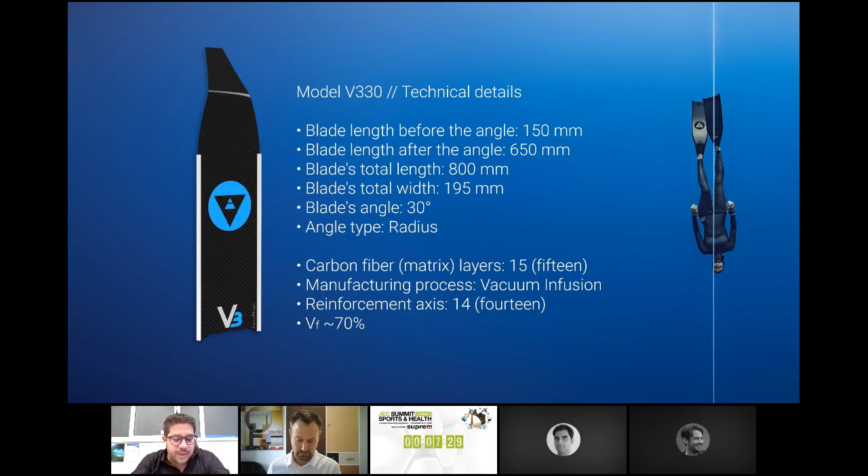This led us into taking advantage of the vacuum infusion process, which we are still using today to produce our blades and fins. That was quite new and difficult at that time because of the high cost of the consumables needed for the infusion process, but we knew that this was the first step to control our fiber to epoxy ratio and have a consistent result. That was our first innovation compared to other manufacturers' way of production, even if it was not cost effective back then. Things changed over time as we invested into a state-of-the-art laser projection system for the dry fabrics layup, and our production capacity has been multiplied several times since then.

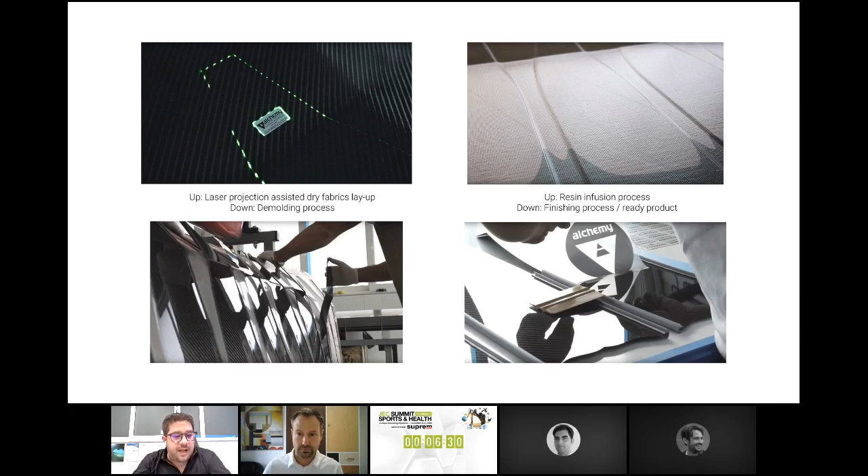Furthermore, what was really difficult to achieve, and we're really proud of, is the carbon fiber allocation within the blades themselves. What is needed when it comes to blades and fins for performance diving is a blade that will be gradually getting thinner and more flexible across its length. Unlike aerospace and motorsports, we're not only after lightweight and stiff parts, but instead we're looking for bending and flexural strength, feedback forces, and fatigue resistance of the part under a lot of stress in underwater conditions.

We address this by using unidirectional carbon fiber fabrics in a V-shape, an industry first in the diving business, which also helped us get rid of the torsional flexion of the parts that resulted in a great loss of power. Thus, the longitudinal flex was enhanced and power loss was minimized, resulting in a great working fin that has taken athletes of our team down to 110 meters below water on a single breath, and back to the surface, of course.

We also designed our own profile for the water rails, which are the silicone parts on the side of the blades that help the fins be steady by channeling the water that moves against them. Using an innovative C-shape, those rails have the ability to expand under a strong kick where more water is needed to be channeled onto the blade in order to perform a faster move.

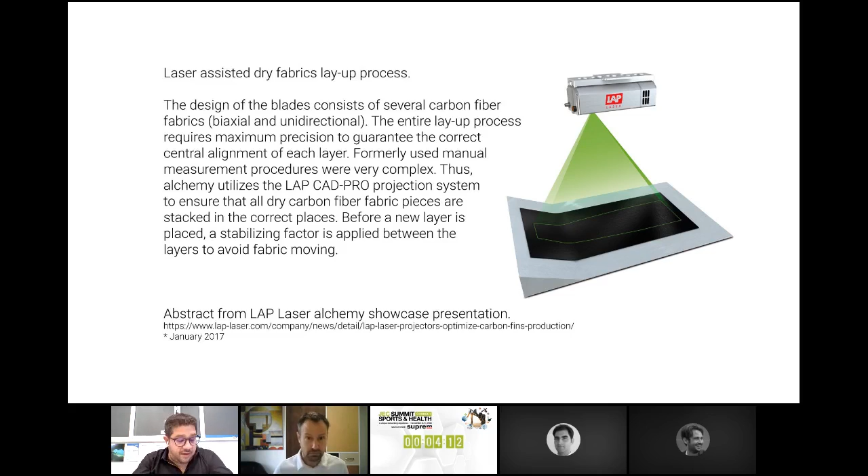Finally, we are really excited about smart composites, and we are monitoring all the innovative raw materials presented globally because we strongly believe that composites that will change their properties according to the conditions they are in are probably a key element of the future top-of-the-line products.

During this process, we also had the opportunity and luck to work with another Greek company called Adamant Composites in a European Space Agency technology transfer project. This project, made for sports, was about using materials developed for space applications into down-to-earth products. It resulted in some great prototype blades for fins with enhanced strength and impact resistance, which were also exhibited at JEC World 2018 Make It Real Planet, and featured on the official European Space Agency International website as a story at the Enabling and Support section.

This project opened up the door of tailor-made nano-enabled prepregs that we are looking to incorporate to our products in the future by adjusting them for even better properties. After 10 years of presence and evolution in the market of diving equipment and several thousands of pairs of fins sold worldwide, we are happy to be a leading figure in our domain.

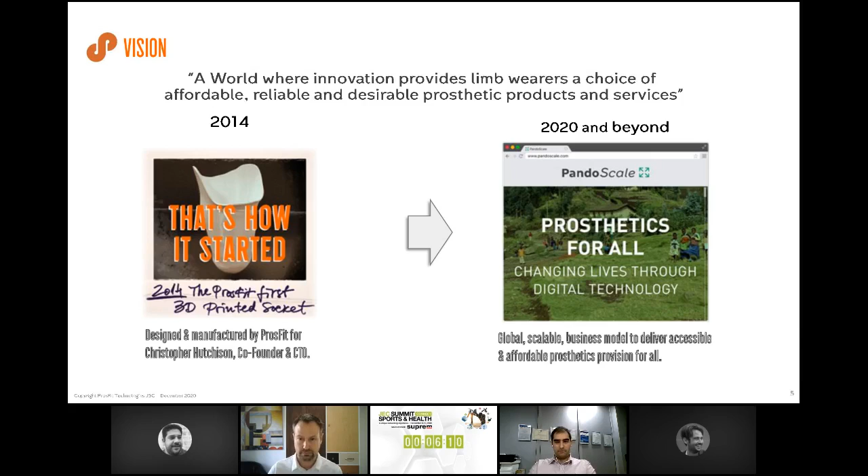So we have developed our solution. We started in 2014 with our first 3D printed socket. That one was already a definitive socket and probably the first in the world. And today, we have a global scalable business model, which should help deliver devices to at least 20 million people around the world if we're successful. How do we do that? Basically, we have changed the craftsman process, the manual creation of the devices, to an industrial process.

The procedure of creating a prosthetic socket involves data capture of the limb. We have replaced the traditional plaster casting of the limb with 3D scanning. This step is followed by rectification of this plaster copy manually. This is now replaced with digital design through CAD software. And then the prosthetic socket, which is created traditionally in a very similar manner to those swimming fins we saw, is now done through additive manufacturing, through industrial machines, and it's highly scalable.

As a result of moving to industrial processes, the outcomes are far more systematic. The data captured from the patient is fully digital. The process for designing the device is far easier to control and measure outcomes. Those two combined give faster provision to the patients, bringing them back to social integration.

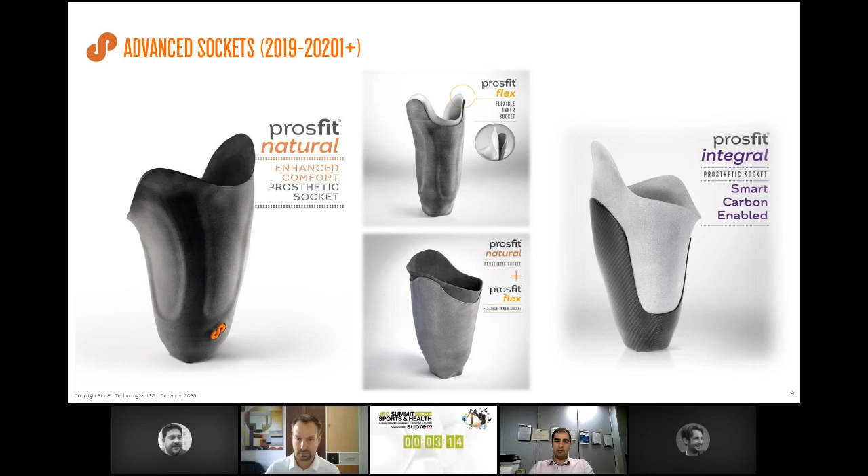So how is this process scalable? We have split it into a few parts. The clinical part is the face of the solution. This is where the patient is admitted, data is captured, and the device is designed by the professional, applying their medical know-how.

As the solution is fully digital, the actual design of the device can be done remotely. The software is available on the cloud. So a single prosthetist could serve multiple patients in many locations. The second part of the equation is ProsFit. We apply the quality control over the design.

We make sure that our devices meet the performance claimed by us. And third are the service bureaus who actually manufacture the devices. They apply outstanding quality control, and deliver the device to the clinic so it can be fitted back to the patient.

The trick here is that the manufacturing is a very high-level industrial process. Equipment is very expensive as such. We have centralized the manufacturing. We have partners across the world who have gone through an evaluation process by us. We are approving our manufacturers that they can meet the requirements of our devices.

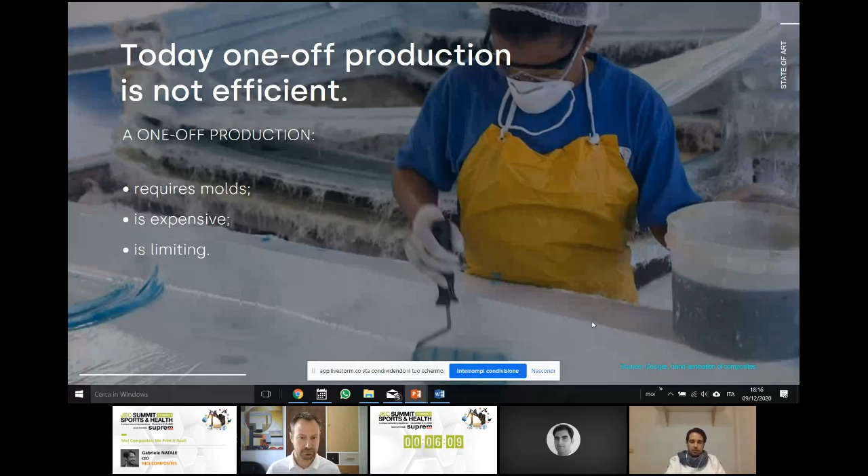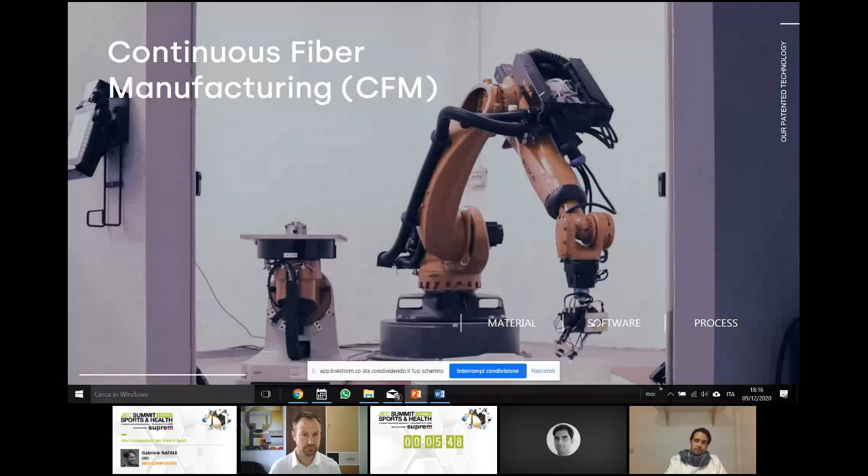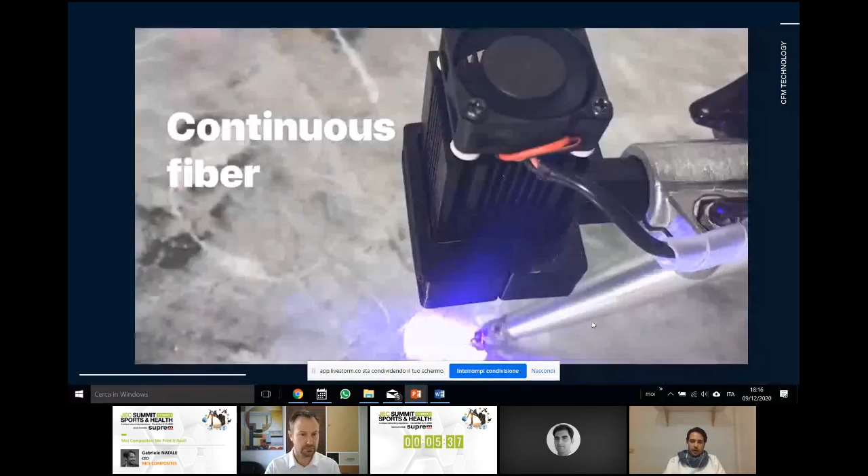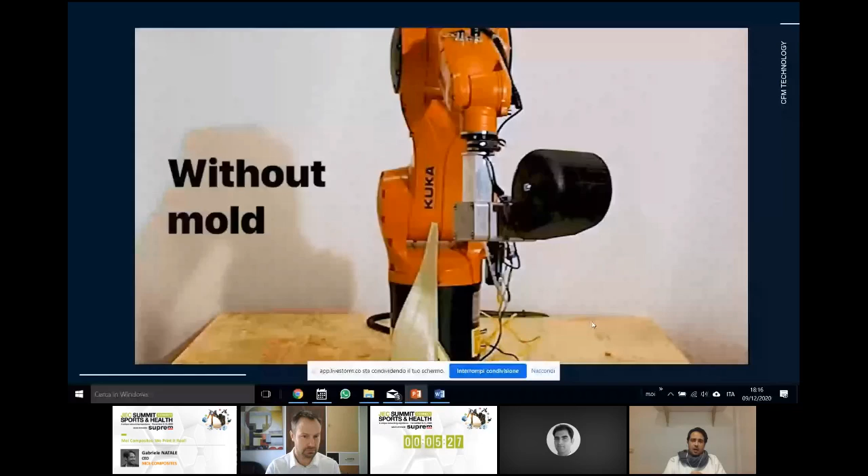So in order to shrink the lead time, we developed a new technology called CFM, the acronym of continuous fiber manufacturing, that is a hybrid technology between an additive manufacturing system and a fiber placement machine. We start from a three-dimensional file, a standard CAD file. We process it inside a software using our own algorithms and send it to a robotic arm that is able to deposit continuous fiber composite impregnated with thermosetting resin. So basically, we print unidirectional pre-impregnated fiber.

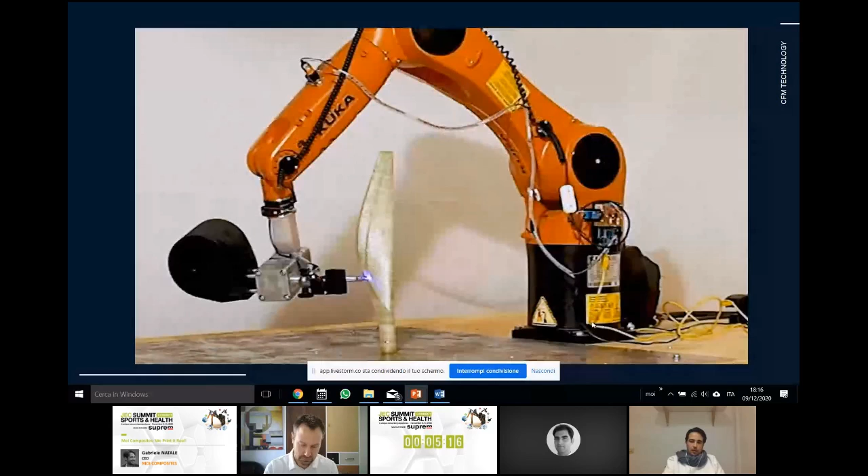Our startup started a couple of years ago. Basically, we started after winning the 2017 JEC award as researchers inside the university. And then in early 2018, we decided to develop our own company. So we developed MOI to further expand the industrialization of our technology and deliver the potential of our solution to the composite market.

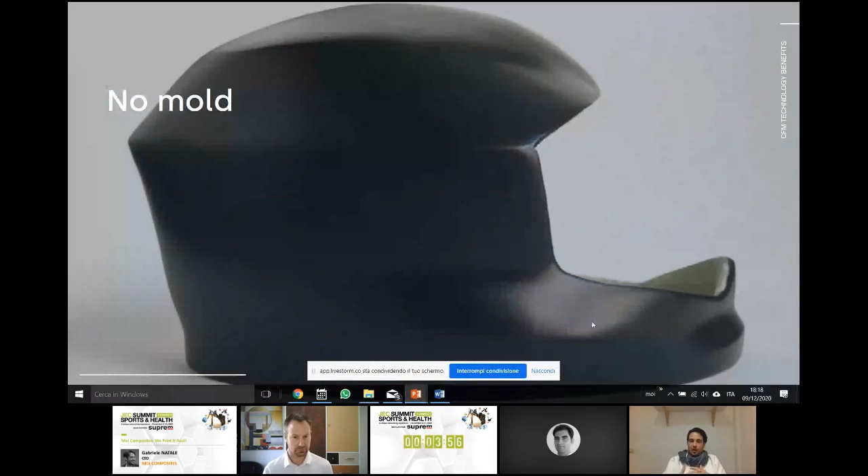Going in depth, as you can easily understand, the technology can be used in a really wide range of applications for composites, starting from automotive, going to aerospace. We worked also for oil and gas, or even in building or in biomedical. As any 3D printing system, our patented process doesn't require molds. So we don't have a break-even point on number of parts produced. And that is really a game-changing solution for small lots.

As you can see here, I think we can play an important role in the sport and health market, in which personalization is a must to have, because especially in health, you need to create custom-made parts. In this case, for example, we printed the foot prosthesis in just 3 hours, and we realized it in fiberglass. This is our first material we can process with our technology. We started by analyzing the 3D model through finite element analysis software, and we inserted the real data of the final user, the patient.

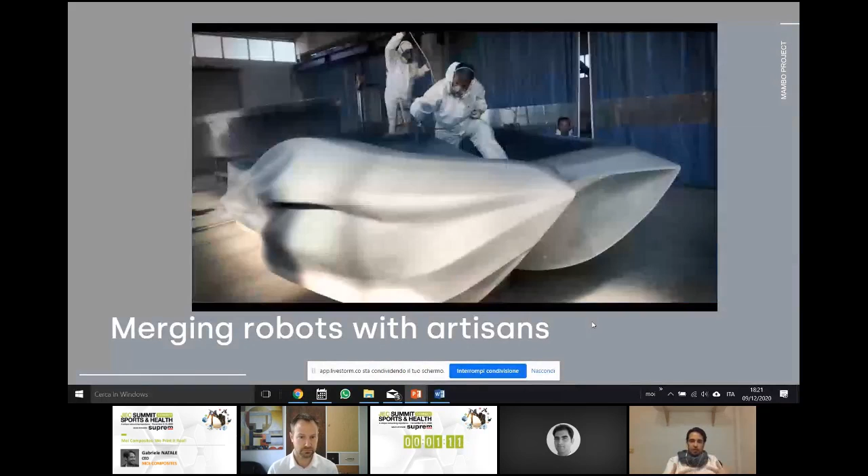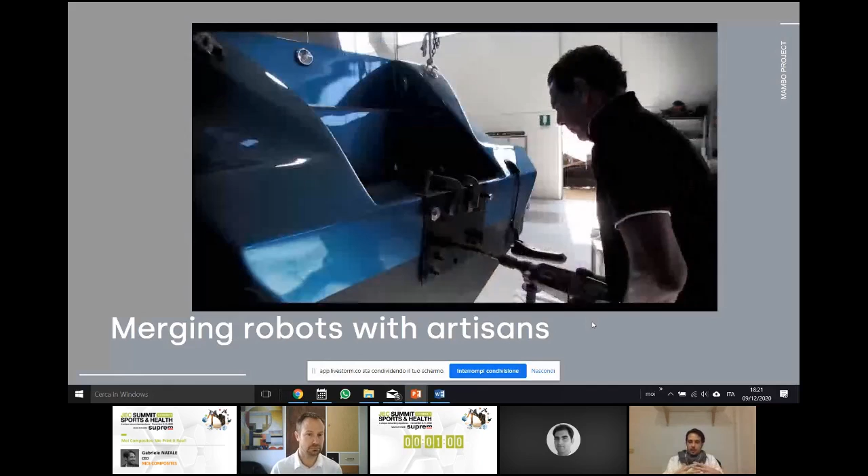And the last project for sport we did, and I would like to show you, is our, let's say, marine toy that is called Mambo. It's our last project we presented at the Genoa boat show one month ago, more or less. The boat is an inverted trihull, 6.5 meters long, and it was created using a monoblock structure without the hull and deck division. Mambo demonstrated we can push the limits of achievable shape in composite even in large size,

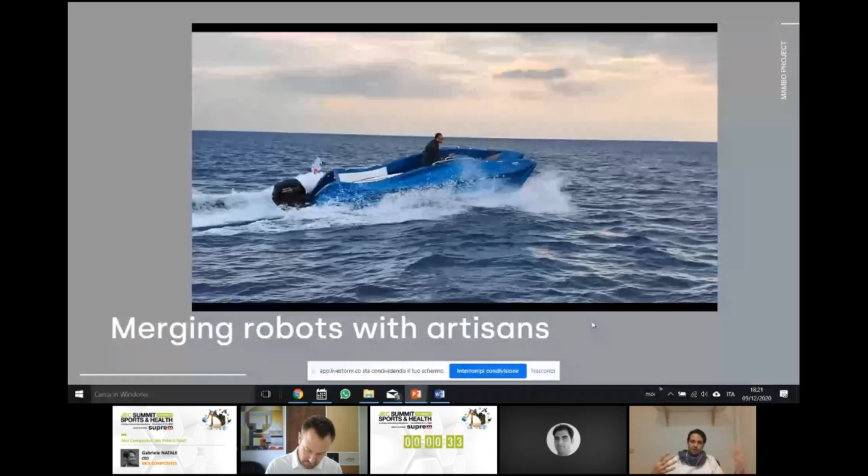like a boat. So the boat was created using two robots that 3D printed the internal core of the structure in different sections, and then those pieces were joined and laminated inside a shipyard. So we also demonstrated that we can merge digital manufacturing technology, so robots, with artisan work. And finally, as you can see here, we tested it in the real environment.

We tested it in the sea many times, and right now we reached up to 26 knots. But we know we can go even faster, adjusting a few settings on the engine.

So that said, as a startup in seed stage, we are always looking to develop our connections. We are looking to develop new materials, new applications for CFM technology, and push more the limits of composite production. So we are always looking for, let's say, industrial partnerships or people who want to cooperate with us.

I would have one to start. So it seems your technology uses UV curing resin, and carbon fibers, of course, do not allow you the transparency to cure with UV. Is there any development or future to be able to use carbon fiber in such a process?

Yeah, sure. Carbon fiber tends to absorb UV light. So actually, maybe we are able to cure the external surface of carbon fiber, but not the inside. Right now, we are changing the curing system in order to be able to process also carbon fiber or other, let's say, non-transparent fibers. We are on the way to do that.

So in a sense, can the technology be used and combined with traditional composites? In other words, can you use that glass fiber as a mold for making a traditional composite? Yes, this is exactly what we did for the Mambo project. We printed just the internal frame, the structure in fiberglass, and then all the pieces were joined and laminated.

Then, of course, if you want, you can also create a mold. If you like the final result, basically from the first boat, you can create your mold as composite producers normally do. So you can obtain a first prototype in a really fast time, but it's not just a prototype. You can use it for real, and then eventually, if you want, you can create a mold from that. Interesting.